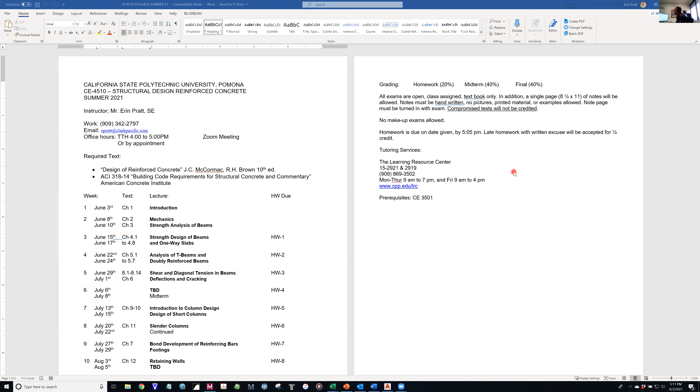Grading for this class: homework will account for 20% of your grade. Homeworks start on our next class meeting on June 8th. I'll post homework number 1, due a week later. Homeworks will be due each Tuesday, starting June 15th and going through the last Tuesday of the class—we'll have 8 homework assignments through this course. They are graded and worth 20% of your grade.

The one midterm is 40%, and the final is 40%.

All exams are open, class-assigned textbook only, and you're allowed a single page, 8.5 by 11, of notes. The notes must be handwritten, no pictures, no printed material, no examples, and most certainly no work from when this class was taught before is to be brought into this class.

We are in hopefully the last time, but we are still in the virtual world. This entire class will be done virtually on Zoom. The midterm and the final will be taken via Zoom and Blackboard. All of your homework is to be turned into Blackboard. I'll go through, as we get closer, how we work those out through Blackboard as well.

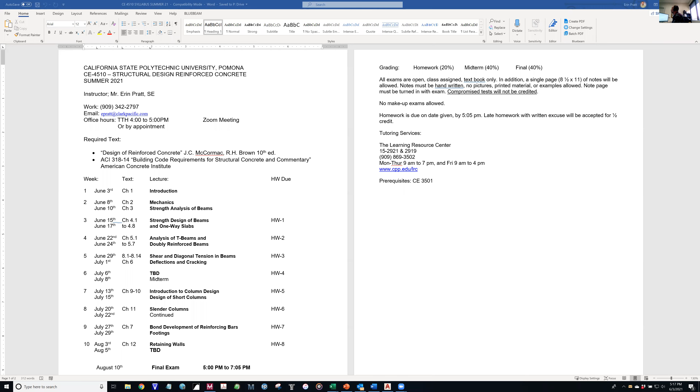All right, so let's start with tonight's lecture. Usually the first lecture, I allow more time because you guys don't know me and this is all brand new. So I allow lots of time for questions. Please do not be shy - you can ask questions verbally at any time, you can interrupt me. In fact, I encourage you to interrupt me with your questions, or you can use the chat function, which I kind of see out of the corner of my eye, and I'll address things like that. If you have a question you don't want everybody to know who asked, just send me a private chat - I see it, nobody else sees it. I'll answer the question, hopefully without revealing who asked it. So that's available to you as well.

Okay, so let's do a brief introduction to the material of concrete and the world of concrete design. Let's start with our materials. Concrete is made of - well, let's see, does anybody know? I gave you the first one, sand. What are the constituent properties of concrete? What are the ingredients? Water, aggregates. Okay, sand, water, aggregates, cement - very important. So there's your coarse aggregates, your fine sands, water, cement. What's the fifth one in our modern day world?

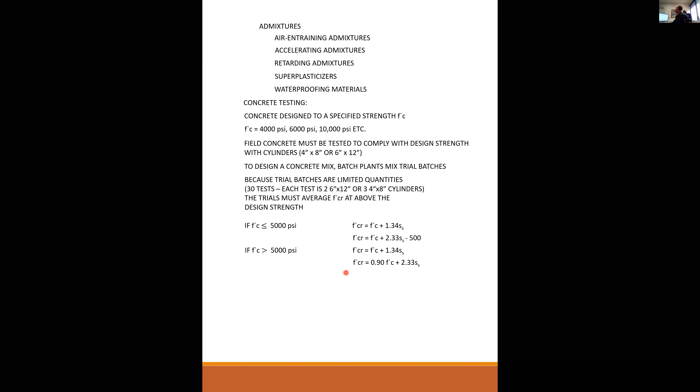So I've done a few of these, and when you run the numbers, if I'm trying to get 6,000 PSI, F prime CR may be like 6,800, or it may be even 7,200. So all these 60 to 90 cylinders have to average out higher than, say, 6,800 in order for that mix design to qualify as a 6,000 PSI concrete mix.

Okay, so this is how it's done on the producing side. When we produce the concrete, we are fairly assured that the concrete's going to perform by this statistical analysis way of designing the mix design.

On the inspection side, site testing side, then the site testing will be considered acceptable if the average of 3 breaks is greater than the design, right? So I break 3 cylinders and the average is greater than my design of, say, 6,000.

And if the design is less than or equal to 5,000, you have no one breaking cylinder less than the design minus 500 PSI, okay? So say you have 3 cylinders and your design is 5,000, right? And one cylinder breaks at 53, one breaks at 57, one breaks at 4,900.

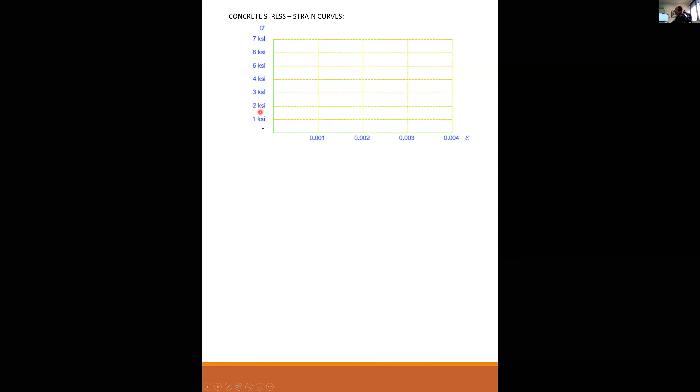Okay, so we're going to look at some stress strain curves for typical concrete, where if you remember from your mechanics of materials, stress strain curves, the stress is the vertical axis, the strain is the horizontal axis. So if I look at just a regular old watery 3000 PSI mix.

What you notice is that as you are loading this concrete in compression, as you get to 1/1000th of an inch per inch strain, you're about 2400 PSI. When you get to 2000ths, you've maxed out at the design strength of 3 KSI. And from there, it just starts degrading, right? So the more you keep compressing it, you don't get as much strength. It's basically on its way to just crushing or destruction. But it does sustain a fairly large strain, even though it's not carrying as much load anymore.

As we go to a 4000 PSI mix, it maxes out at 4000, as you can see. It maxes out at about the same point, .002, but notice that it kind of falls off quicker than the 3000. Here we have a 5000. Same idea, it hits the maximum of 5 KSI at about .002 on the strain, but it drops off even quicker still. So what's happening is the stronger the concrete is, the less strain it's able to sustain. It becomes more brittle. So the lower strength concrete is more malleable or ductile, if you will. The higher strength concrete becomes more and more brittle. And 6000, same trend.

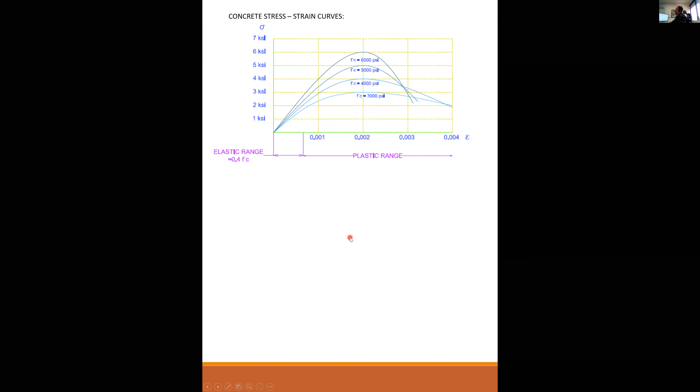So on the stress strain graph, what we're going to call this is between 0 and roughly 40% of the strength of the concrete is acting basically elastically. So that means the stress strain curve is basically a straight line in this range from 0 to 40% of the strength of the concrete. Beyond that, the concrete enters into what's known as a plastic range, where you have this kind of a parabolic or polynomial type of shape to it.

And this comes in later for our strength design of columns and beams. So recognize that at the design strength of a column or beam, you're well into this plastic range, well outside of the elastic range. But if you're designing a concrete column or beam for serviceability, like cracking criteria or deflection criteria, then you will be in this elastic range.

Okay, so that's why I'm talking about this. We have these two distinct ranges. The elastic range is used for checking serviceability, which is namely cracking or deflections or vibration. And we have this plastic range that is used primarily for checking ultimate strength. Ultimate strength is like the nominal capacity of the beam in flexure or in shear, whatever. But we have ultimate strength based on the plastic range, and we have serviceability based on the elastic range.

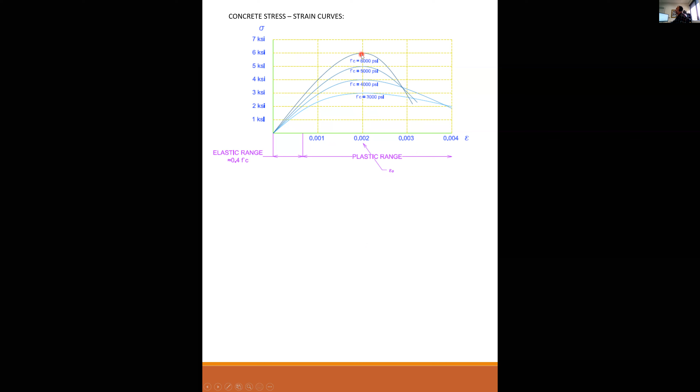This value here, the .002, is known as epsilon naught, and it varies a little bit, but it's basically where the concrete maxes out. It's the strain that corresponds to the tested maximum strength of the concrete. So epsilon naught is the strain where maximum compressive stress is reached. Epsilon naught is more or less 0.002 inches per inch. And then we have this epsilon C, which is the assumed maximum usable strain.

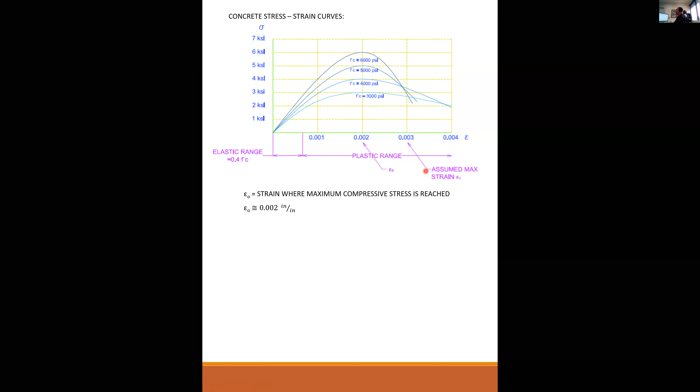So epsilon C is the assumed maximum strain that is reliably achievable. Concrete may go to 4 thousandths or even beyond in these lower grades, but not always, and it's not really super predictable. So the code body, ACI, has basically made a decision: we're going to design to 0.003. Basically all of these mix designs achieve 0.003 but not a whole lot more. Once we get to the design phase, it doesn't make a huge difference if you assume 0.003, or like the Eurocode which assumes 0.0035. Doesn't make a huge difference, but it gives you a benchmark, something concrete you can design to.

So for our purposes, and for the purposes of anything governed by ACI, the maximum usable strain is 0.003 inches per inch. That is documented, and this is how you're going to see this at least 1,000 times.

I'm doing this because you need to know where to find these things. So ACI 318, the 14 is the edition, the year we're using. We are still in the 2014 edition of ACI 318. The 2019 is out, I have a copy right here on my desk, but it's not adopted yet by the legally binding code authority. So until they adopt the 19, we're still designing to the 14. This curly symbol represents the section, so this is telling you it's in section 22.2.2.1. That's where ACI 318 legally tells you that you have to assume 0.003.

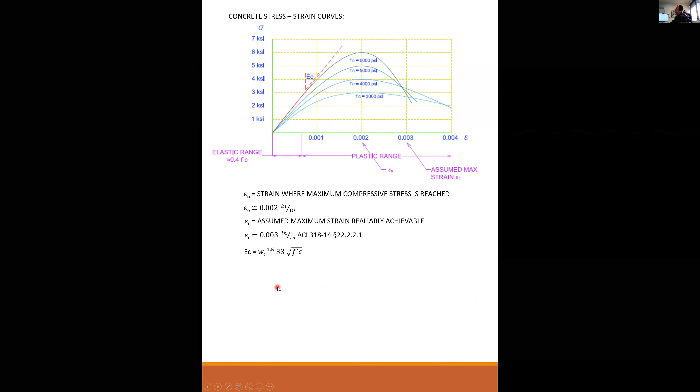Young's modulus is defined by the code as W sub C to the 1.5 times 33 times the square root of F prime C. This is applicable for all concrete densities, where W sub C is the density of concrete in pounds per cubic foot—got to make sure you get that unit right. And we can use the simplified version, Young's modulus defined as 57,000 times the square root of F prime C, which is applicable to normal weight concrete only.

And of course Young's modulus, E sub C, is valid only in the elastic range. Now another thing you'll find through this summer course is that a lot of equations defined by ACI 318 have this square root of F prime C. That's a very common component of ACI equations, and really all it means is that a lot of this stuff is empirical. They found that a lot of the empirical data fits very well to the square root of the compressive strength of the concrete—it's just the best fitting function based on that strength.

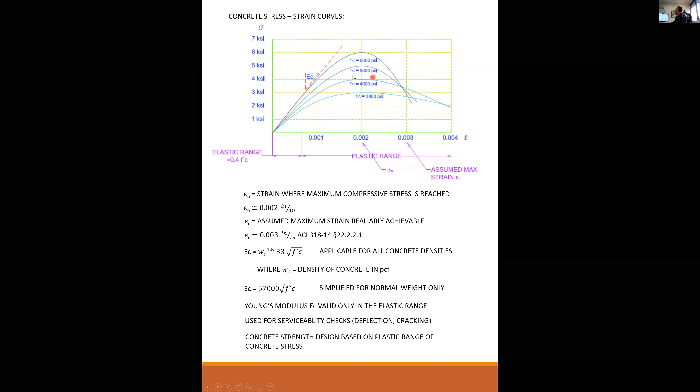Okay, so Young's modulus is used typically for serviceability checks: deflection, cracking, vibration maybe. Concrete strength design is based on the plastic range of the concrete stress. This range here is the range we use for strength design.

So after, we generally use 5 years. So generally after 5 years, any increase in strain or deflection, anything like that, basically is done.

Shrinkage is the expulsion of water over time. Just due to the atmosphere, the water finds its way out of the concrete and eventually evaporates. Shrinkage creates a reduction in volume. The concrete shrinks, obviously, but that shrinkage can cause cracking in restrained concrete pours, right?

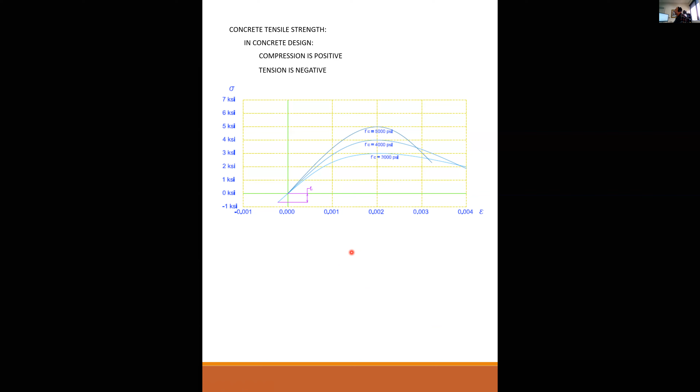We have this measure of the strength of concrete in tension, where F prime C is the design strength in compression, and F sub R is the design strength in tension. F sub R has a name for itself: it's called the modulus of rupture. The modulus of rupture, F sub R, is equal to minus 7.5 lambda times the square root of F prime C.

This lambda factor varies from 1 to less than 1, and it's there to account for lightweight concrete. Lightweight concrete cracks at a lower stress than normal weight concrete, so we have this factor, lambda, to account for that.

Notice that the modulus of rupture is negative. So your answer to this, for 6,000 PSI, would be 6,000 to the 0.5 times minus 7.5. For example, normal weight 6,000 PSI concrete has a modulus of rupture of about minus 580 PSI, which is not a whole lot.

Then we have epsilon sub R, which is a corresponding strain that we assume corresponds to the modulus of rupture. The modulus of rupture occurs at epsilon sub R, and remember we're assuming we're in the elastic range here, so it's equal to the modulus of rupture, F sub R, over Young's modulus. It ranges anywhere from about 9/100,000ths to 15/100,000ths inch per inch. So it's an order of magnitude less than the strain where you get the maximum compressive strength, say 2 thousandths inch per inch.

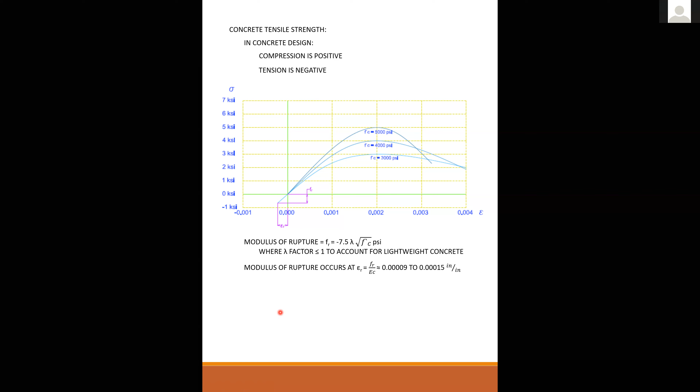Okay, let's talk about shear strength for a minute, and I'll get back to that lambda factor in just a moment. Concrete shear strength - so instead of compression strength, which we've been talking about, and then tensile strength, now we're going to talk about shear strength.

In the world of concrete, the actual shear strength is very difficult to measure, nor do we actually even care. The actual shear strength of concrete hardly, if ever, controls the design. This is a weird concept, but even though we say the concrete failed in shear, concrete doesn't actually ever fail in shear. What it fails in is diagonal tension. Concrete is much weaker in diagonal tension than it is in shear and will fail in tension first.

I don't know how long it's been or who taught it to you, but if you recall back to mechanics of materials, the part of the course on stress and strain transformation, where you had that little cube element with sigma x, sigma y, and tau xy - you can figure out that element has so much normal stress horizontally, so much normal stress vertically, and so much shear stress. If you rotate that element, you can find the angle of rotation for the minimum principal normal stress, the maximum principal normal stress, and where the shear stress is zero and where it's maximized.

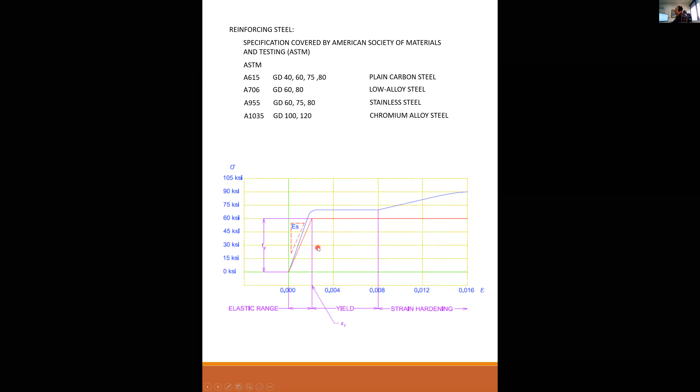You have Young's modulus for the elastic portion. The blue line represents the possible actual rebar stress strain curve. The real curves can vary significantly, so they can have all kinds of shapes, but this is a typical shape. The red line represents the bilinear assumption for concrete design. Again, in design, we never assume the blue line, we always assume the red line for simplicity, and it consists of two segments: an elastic portion up to the yielding strain epsilon y, and then a flat yielding portion from epsilon y basically to infinity.

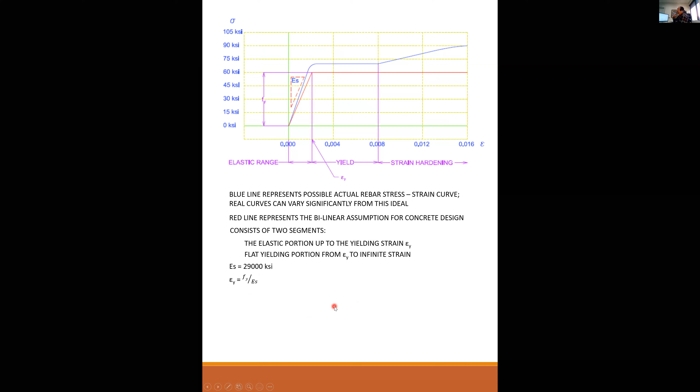Young's modulus for steel is 29,000 KSI, that's a fixed number that doesn't change. The yielding strain, epsilon y, is the yielding stress or the grade divided by Young's modulus, which for grade 60 is going to be 2,070 microstrain, or 0.00207 inches per inch.

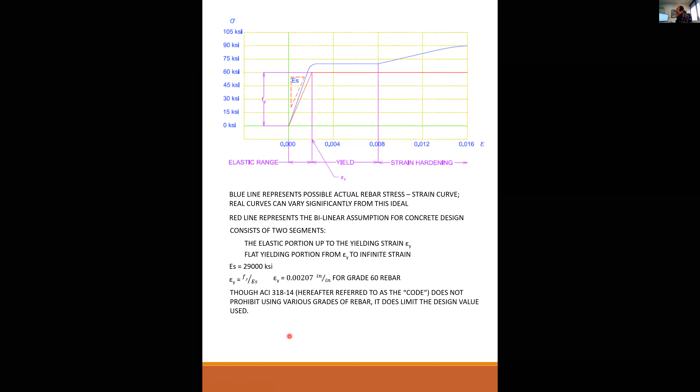Though ACI 318-14, and from now on I'm just going to refer to it as the code, does not prohibit using various grades of rebar, it does limit the design value that is used. Table 20.2.2.4a on page 329 of ACI 318 prescribes what yield stress may be used in various conditions. Higher grades may be detailed, but the design is limited to the grades from that table. So as we go through these lectures, you're going to want to have that ACI 318 right there, so you can look things up and bookmark them or tag them, whatever you want to do. When I call out these important sections, you want to be able to find those later.

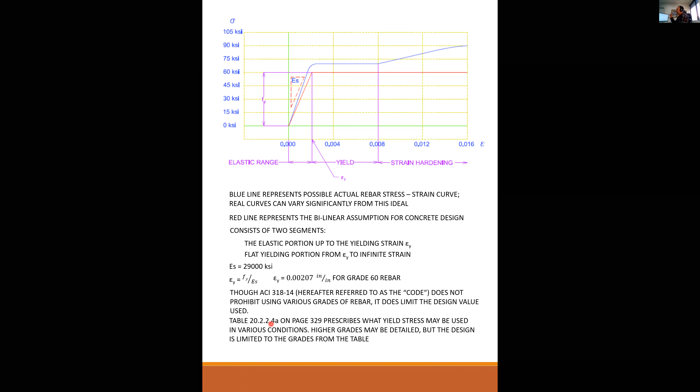One of the classic evil jokes of a concrete professor is to say on a test, what's the area of a number 12 rebar? Ha ha ha. And we just laugh because there's no such thing. Why is there no such thing? I don't have a clue.

But when they established these sizes historically, there used to be a number 2, and there may have been some weird sizes in between. Basically those ASTM specs I referred to, the 615, the 706, have standardized these areas. What's interesting is that each manufacturer of rebar, whether it's Cascade or Tamco or whoever's rolling the steel, can have a different profile of what the cross-section looks like. Some have slightly fatter ribs, sometimes slightly taller ribs, but they all have the same area. So these areas are standardized.

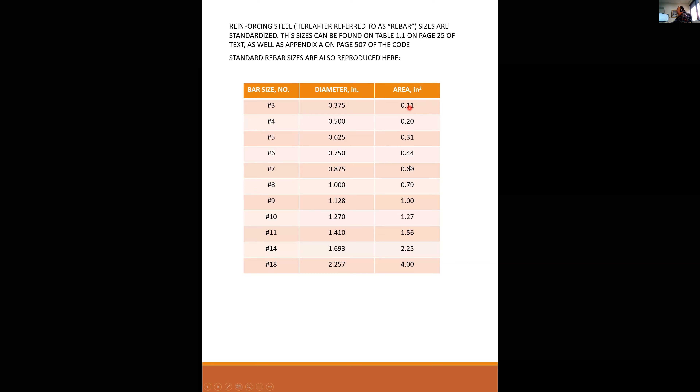Okay, so that's it for tonight's topics, that's tonight's lecture. We'll get into some other fun stuff when we get to these different pieces. That was just an introduction.

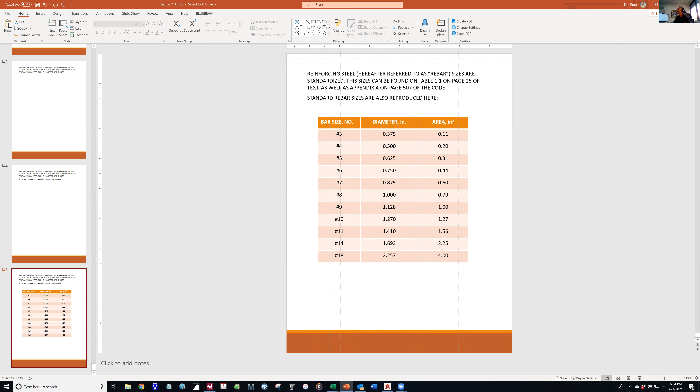Anybody at all? Can you show us the book again, Professor, for ACI? Sure, let me stop sharing. All right, now I can kind of see you guys. Okay, so that's the ACI code.

Now this is published by the American Concrete Institute, ACI, and they sell these books because they want to make money. It's probably not a very cheap book, so I'm not sure what options you have through the bookstore or otherwise—I don't want to know. But it is worth getting a copy of that. I think the bookstore does offer it, I'm not sure if there's a student rate or something. If you find an older version, most of what we're going to be talking about is in the older versions, especially the foundational stuff.

It's not going to be in the same sections as what I refer to, not even the same chapter, because the chapter organization they had from the 70s until 2011 was radically changed for 2014—they reorganized the whole book. All of us who've been using the older versions really had to struggle to find anything in the reorganized version. But one way or another, I think it's really important that you have that code book. If you had to choose between the textbook and the code book, the textbook is mandatory for this course—you're going to need it because all the exams are open book. The code book is recommended, highly recommended. It's very valuable to have that as well as the textbook. So if that makes sense.